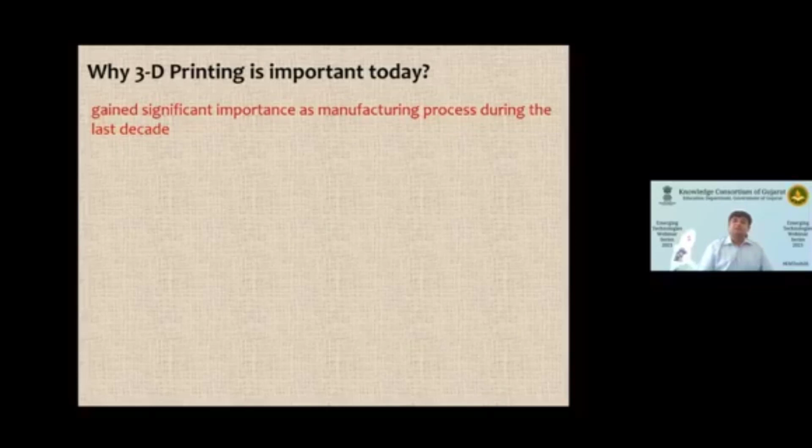For example, if you look at a market survey conducted back in 2017, it says that the market for 3D printing exceeded from 1 billion to 6 billion between 2009 and 2016. That's a 6 times rise, which is not a small number. So if you had 100 rupees in sales, by 2016 it became 600 rupees in sales within just 7 years. It's a huge market which has grown.

In fact, if you look at the Wohlers report, what they forecasted in 2016 is that it's going to grow at an average CAGR, that is compound annual growth rate, of about 31%. If you keep growing at this rate, you become a huge business. And if you look at forecasts made in 2016, valid till 2025, people are saying it's even going to grow at a much faster rate than what Wohlers reported.

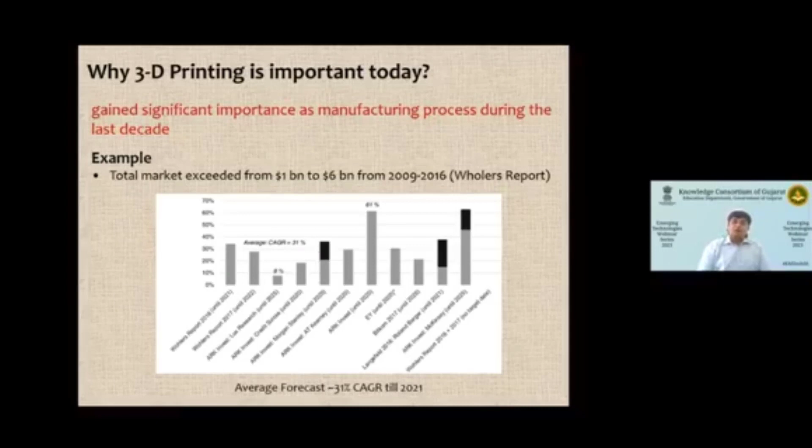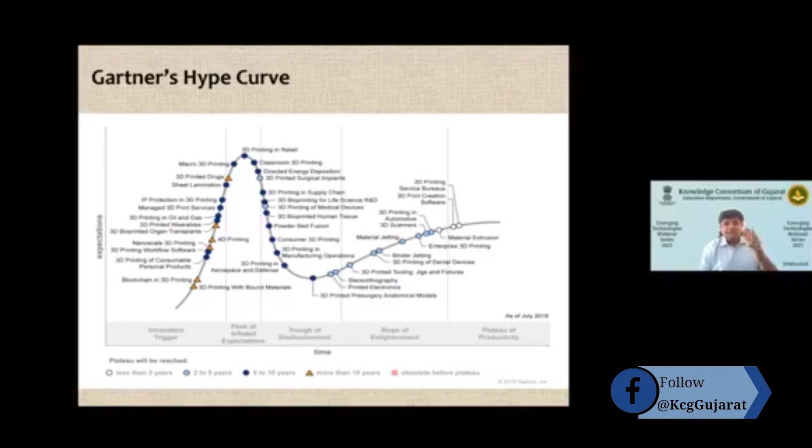For budding engineers who want to know the newer technology trends, I advise them to see a journal or articles published in a document called Gartner. Gartner's hype curve in 2018 presented different 3D printing technologies at different levels of maturity in the life cycle.

If you look at the right hand side of the screen, this has reached a kind of mature level. On the left hand side of the curve, it is something that is actually being conceived in the minds of people. In between these two extremes, the technology grows, eventually expectations fade, and then it becomes mature. For example, the concept of 3D printing today has reached a maturity level, so people understand that this is something they can do via 3D printing, and it is a process with potential.

In fact, one of the commercial processes like material extrusion, which Professor Patel was mentioning in his talk, has also reached a maturity level. When the technology reaches the plateau of productivity, it is understood that the technology has started becoming mature. A definition of maturity is that a common person knows this technology and accepts it as a standard solution.

If you look at the second zone on the right hand side, it is actually talking about the slope of enlightenment. I'll tell you briefly about any new technology. Whenever we talk about new technology, the first thing that happens, seen on the left hand side, is an innovation trigger. So what happens? People will think, can I apply this to a given problem?

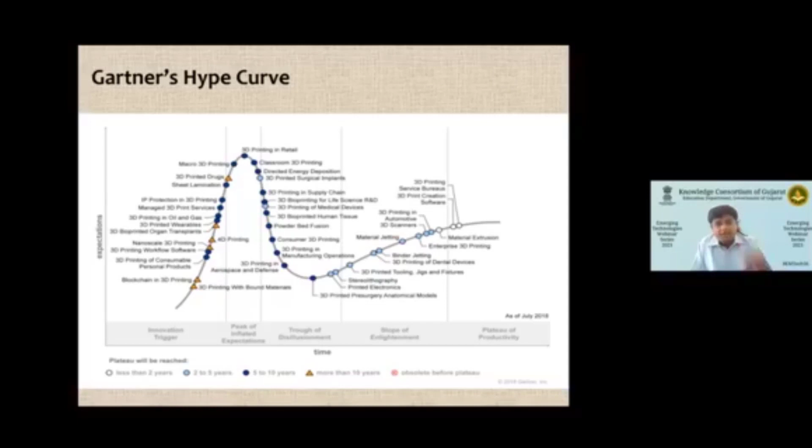So with this background introduction, what I presume for this talk is the audience does not know 3D printing at all. So maybe a few initial minutes I would spend on talking about the basics of 3D printing. And eventually we will go to some of the unusual applications, for the people who actually know 3D printing a bit. Where can they take their technologies forward, and some of the unusual applications. What do I mean by unusual? This is what we shall also talk about subsequently when we actually go into that particular aspect.

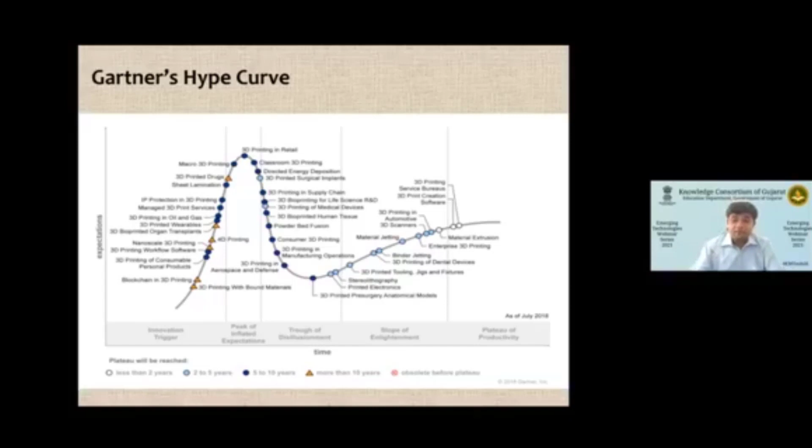Okay. So if you ask a layman or somebody who has a little bit of knowledge of 3D printing this question: what is 3D printing or additive manufacturing? This is a common question that you should have, and somebody who is a completely non-knowledgeable person would say, what bluff is this person making? Let me ask him this question, what is 3D printing or additive manufacturing? So I would say that if you look at history, it originated as a rapid prototyping solution. So another common name which you will find for it in the literature is rapid prototyping.

Now, what do we mean by prototyping? All of us have studied different prototypes, be it an engineer or a non-engineer, at one or the other point of time in our life. We all have studied prototypes. So these prototypes are the replica of the actual component. Say for an example, my son is in second standard, so when he was going to school, he asked me, what is this globe?

So there is a very nice globe which we all see in early schools, which talks about orientation of continents and water bodies. It is not a globe, but it is a prototype or a replica of a globe. It helps me in realizing that the globe on which I am living has a certain shape. This is my neighboring country, without actually going there. Even if you go to higher level schools, people talk about a prototype of a solar system. So we say that this is the sun at the center, and the sun also revolves and rotates about a certain axis. There is an earth which is lying here. So these are all prototypes.

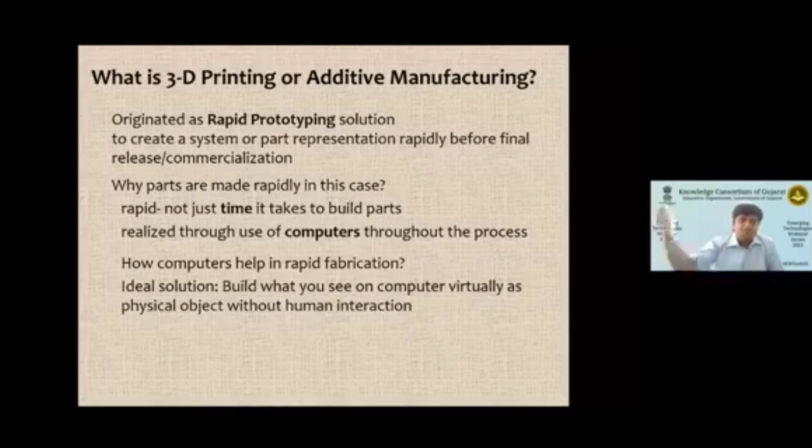Here the thing is, my computer is connected to a machine. I press a button, the things will go to a machine and the machine will start doing things on its own. At the end, when it completes, I get a message on the computer that says, ready for delivery. I go to the machine and I collect it. So this was the philosophy. And this is how people started building 3D printing.

So the overall philosophy was, as Professor Patel also mentioned, that a virtual representation of a physical object on a computer was called a CAD model. And you transform the CAD model directly into a finished product. So what advantage do you expect if it is reality? You will be gung-ho, right?

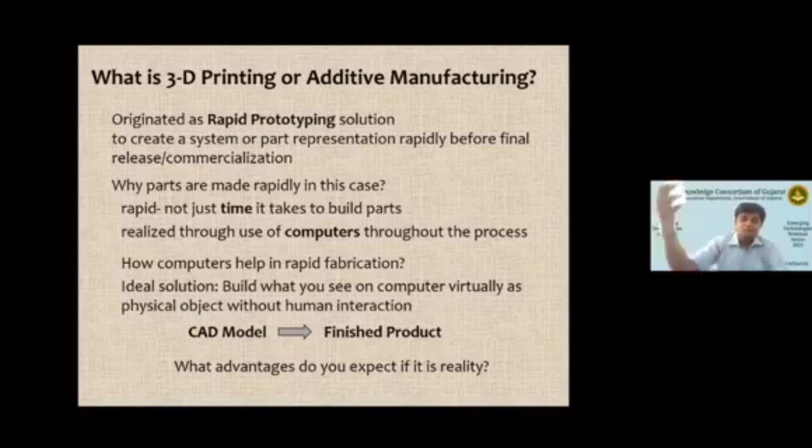You don't need to worry about manpower. Labor was a big problem in COVID times. A lot of manufacturing engineers would tell me, if this can happen, I would jump to buy this machine, right? So there are many advantages. You are not relying on an operator. You are not relying on the skill of a person at all. You are not relying on a lot of other aspects, that this person will give me that, that person will give me this, and if they all come together, I will build this. All these questions would disappear from the mind and you will become fearless in designing. You will become fearless in manufacturing. So there are many advantages.

So before we actually look into 3D printing, let us look at a couple of approaches for how a component is made. Historically, say this is a component that I want to make. This is just a cross section, and it has some depth, some thickness, which is not shown because we are seeing it on a 2D plane. If I want to make this and go to different people, one person would say, I would take a larger piece and cut the shape out of it. This trimming of the unnecessary area from the raw material is referred to as machining.

Another set of people would say, why are you cutting? You are producing waste. Rather than that, break this into two pieces and then stitch them. And there are commercial variants available. A lot of people would say this is welding, joining, brazing, riveting, whatnot. So there are manufacturing processes available to achieve this. So this can be another approach to realize this.

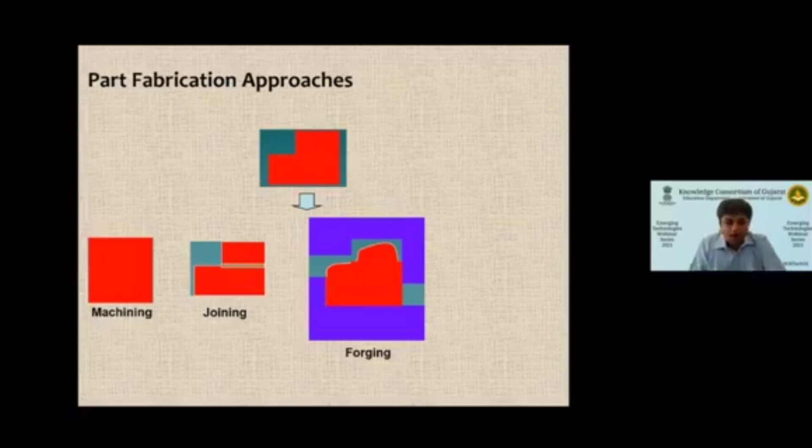A third set of people would say, no, I have a die and a punch, and I would compress the near net shape component between these two in order to get the required shape. Those who are manufacturing or mechanical engineers know this operation; they call it forging. But what do they do in 3D printing?

...is philosophy. And if you look at these three, to reach a final object, all three follow different routes. Say if you talk about machining, you are going to cut. That means you need a mechanism to cut. If you are talking about joining, you are going to need a physical mechanism to create a joint. If you are talking about forging, you need a punch and a die, which is tooling, and then you need a component which has a shape close to what you are seeing.

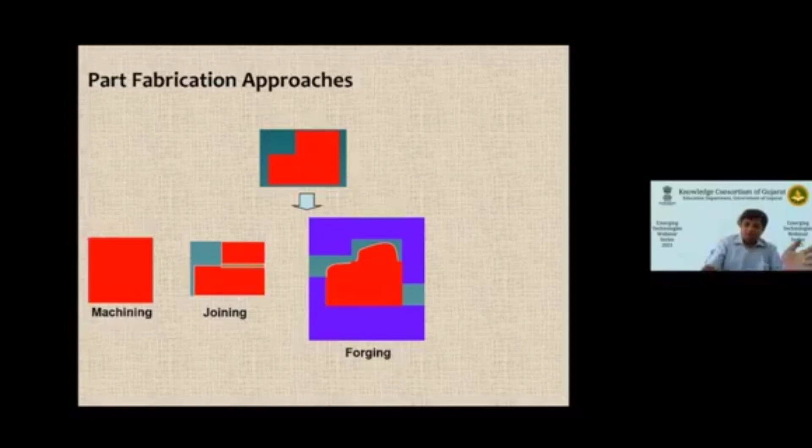Although one more option I have not included here, there are many more options, but these three, if you look at them, have unique approaches. When you talk about rapid prototyping or additive manufacturing, it also has a philosophically different route. What it says is, you basically slice a component.

So rather than having a final idea of a final shape, what you do is you create slices. You know these, and you know the sequence in which these slices are to be joined. And you design a joining mechanism for these slices, and then you build an object. These are all different slices, joined together in order to realize a component. And this is the driving philosophy for building a component using rapid prototyping, 3D printing, or additive manufacturing.

Please understand that. Okay. If you look at the example, say you want to design a very elegant and aesthetically pleasing teacup, because we've been speaking almost 20 or 30 minutes now, so you are tired and you want to have tea. So there is a computer model of a teacup that you created, and you want to achieve a 3D printed cup of that, so you can actually build it. You can see this is a reality today. All these layers are built, deposited together, and a cup is generated.

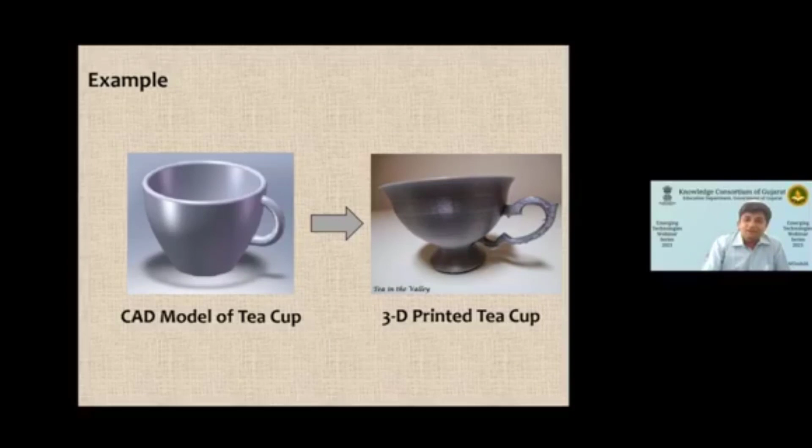So the overall philosophy of the process is what? You build a CAD model as an idea. In your computer, you have a mechanism to slice the object. So you create slices. This second operation also happens on a computer. So the first and second operations are done on a computer, and this computer will send an instruction to the machine to actually generate a physical object. So in the third step, your physical reality happens. Steps 1 and 2 merely happen on a computer.

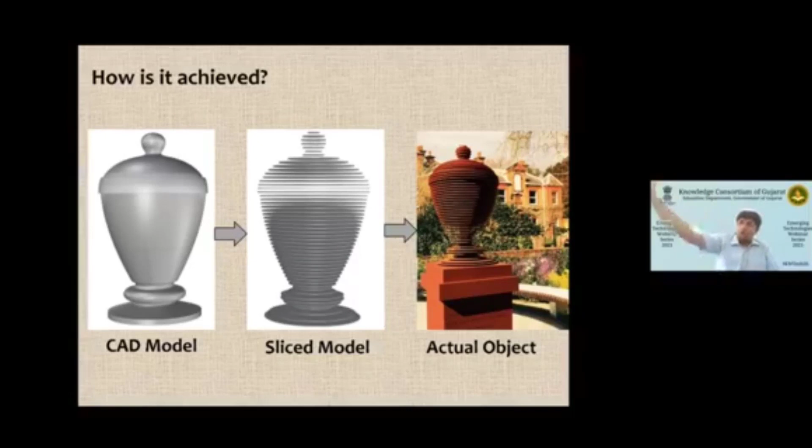It also helps you save time. The reason is, your machine will not be occupied. When you are doing this, it can do some other activity. So there is an inherent advantage of the process, because the machine runs in a completely unattended mode, since the instructions to run the machine come from the computer. You do not need an operator to run the machine, unlike typically a forging machine, or a lathe, or a milling machine, or a drilling machine. The machine will run on its own. You need to generate an instruction on a computer.

So if you look at the 3D printing community, a lot of people work in these two rectangles, and these two rectangles are the software part of 3D printing. Meanwhile, there is a big challenge in terms of joining, because in Gujarati we all know there is a proverb which says Sandha Etla Vandha. And here you are creating infinite joints, and the challenge is how all the layers you created will remain together so that this looks like a cup, and when you hold it in your hand, it does not bend or break because your joining was not proper.

So there are challenges in joining. So there are a set of people who work on what are the challenges. There are challenges in terms of creating this slice. It's not simple. When you give a command to computer, there is something at the back of your computer, some program which you have written which does this slicing, some mathematical equations that you have written in form of a software code which does this. So there is a challenge.

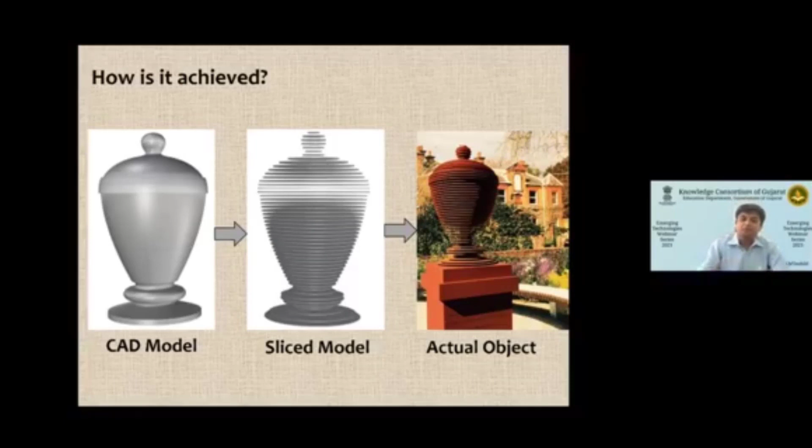Now, those who are working in developing a physical object basically worked on different technologies. So they say that the raw material that I pick up, because to build this physical object, I'm going to need some material. And you know the material will be available in either of the three forms, which could be a solid, or a liquid, or a gas.

So there were people who chose solid as an option and started building this physical object, and they picked up a solid wire. They said that I will melt a solid wire and I will deposit it, and then eventually it will solidify in form of a layer. On top of it, again I will build another layer. This is one of the very common and popular approaches which uses a solid wire. And the process is known as fused deposition modeling.

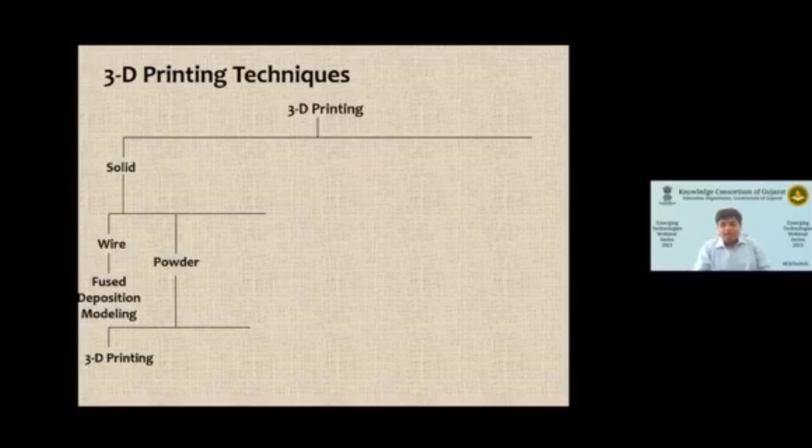A lot of people said, I don't want to pick up wire, I can pick up powder also. So a lot of people actually picked up powder. So it's a solid material converted in form of a powder. And then somehow you deposit a layer of powder, and then you create a thickness layer from that powder, which is a solid entity. So when you do some action, it becomes solid. Eventually, you use that as one layer. On top of that, again, you deposit a powder, you do some action. So both these layers will get joined, and subsequently different processes were developed.

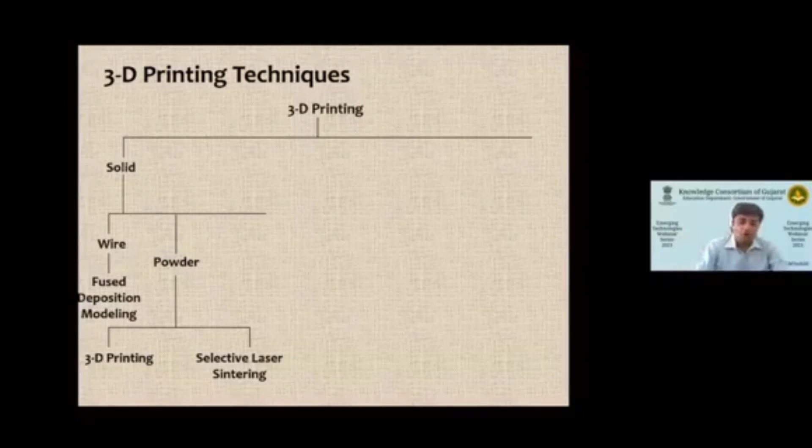There are two very popular commercial processes available in that route. One is known as 3D printing. There are two more variants which we shall talk about subsequently, and another variant is called selective laser sintering.

A lot of people said, I don't want to pick up wire, I don't want to pick up powder. They said, I will pick up a foil. So a lot of you would be carrying food in your tiffin, and to keep it hot, we all use a foil, aluminum foil, right? So in aluminum foil, I wrap the food. The advantage of aluminum foil, or a structure like aluminum foil, is it is already available in a layered form. See, the challenge in wire and powder is I am building what? A layer from something else. But here I have a layer readily available.

So what I do philosophically in a foil is I put two foils together, and then eventually I remove unnecessary areas, because the foil would be available in a standard shape. So I will cut the foil to some shape which is available in that layer, and then I will deposit one layer, one foil over the other foil. And you all know there is a technology available to do that, which is called lamination technology. So you all get your mark sheets and the papers which are to be preserved for a longer period laminated. And that is why the name given to this process is laminated object manufacturing.

There is another route. As I said, you cannot use liquid, but there is an intermediate route wherein you bring a paste. So paste is something which is like a Colgate, a mushy state. So it's a semi-solid state. I can also use a semi-solid state to deposit a layer.

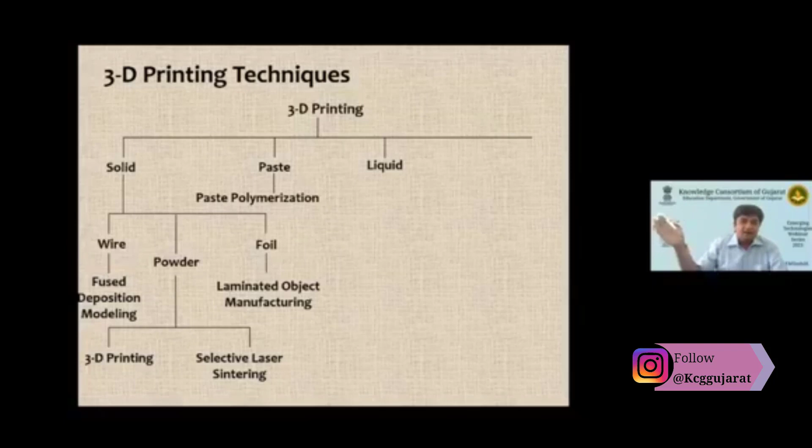Eventually, I have a mechanism to solidify the paste into solid shape in the layer, and then I deposit another paste layer, and over a period of time, I build a component. The other extreme of a paste is a liquid. So I can also use liquid, and there are different routes in the liquid route.

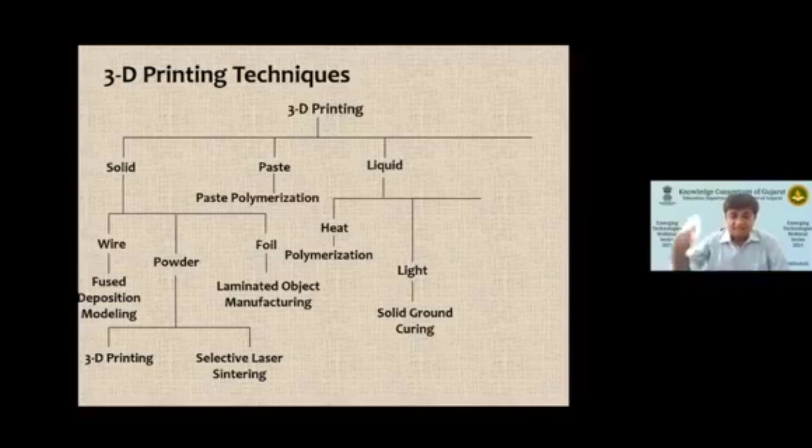So what you do is you increase the temperature of a liquid by heat. The process is called polymerization. I can apply light on a liquid, so it gets cured, it converts itself to solid. Or a third option is I can always incident a light of a certain frequency. So that is called stereolithography.

In fact, a lot of people are exploring, can I convert gas to a solid directly? Those who are researchers in this domain would be knowing a technology called LCVD. So this is where people are trying to build a layer of a solid from the gaseous state itself. So ultimately, this is the state that I pick up from which I build a layer, and then I build subsequent layers, and these subsequent layers together will result in a three-dimensional component.

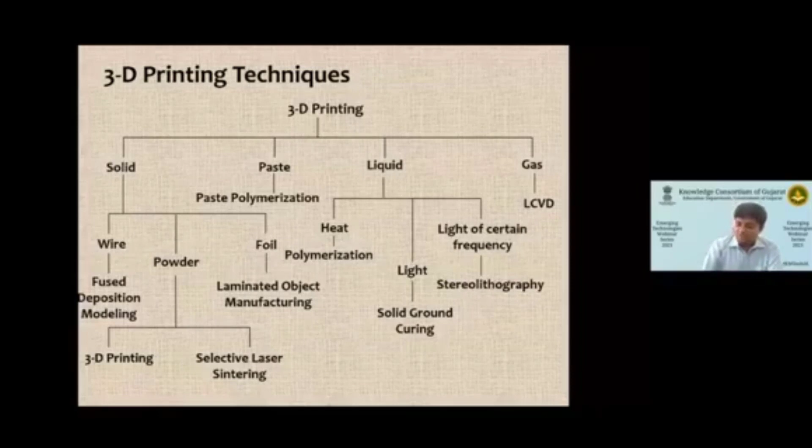So these are different 3D printing technologies that a lot of people build. And when people start building many technologies, some standardization is necessary. So there is a body called ASTM, and this ASTM has given a classification of 3D printing or additive manufacturing into not seven, but actually 8 groups. So they say that one of the governing principles that you use for building a component can be extrusion of a material. If you remember, we talked in a previous slide about a wire.

So what I do is I have a heater. In that heater, the wire goes and the wire melts, and what comes out is a paste-like material, which is an extrusion of the liquid material. The process in that family was known as fused deposition modeling. The technical acronym given to that is FDM. There were powder-based processes, as we discussed. The technical name given to them was powder bed fusion. And another name which was given was selective laser sintering, SLS.

2 more variants were also clubbed together into a family, which are mainly depositing a liquid jet and then letting it solidify. So that was called material jetting. We shall be talking about all this subsequently. Another variant which was developed was binder jetting. Another classification which they gave was sheet lamination or laminated object manufacturing. Converting liquid directly using a light source, those processes they put together into a VAT photopolymerization family.

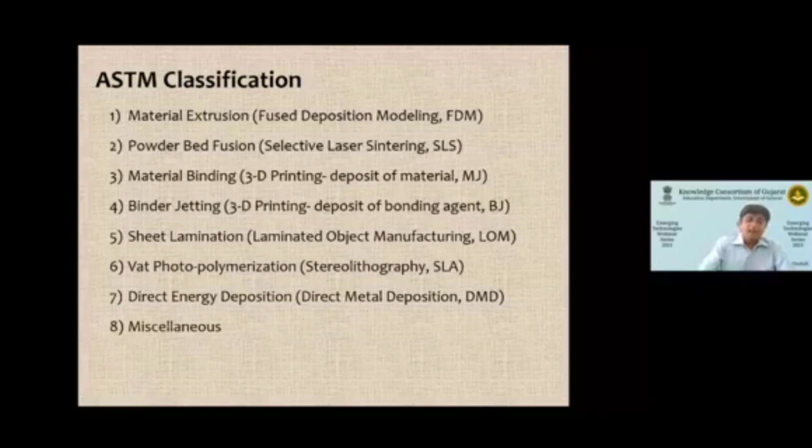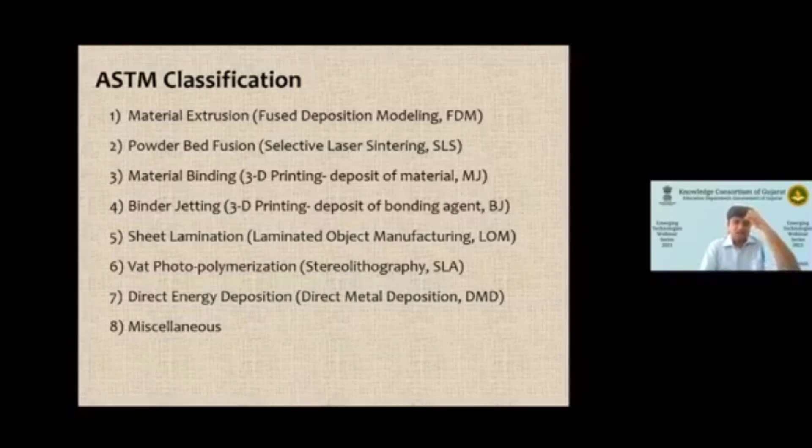In fact, the 7th one was developed very recently, maybe a decade ago. It is called direct energy deposition. It is not developed as a prototyping process. It is developed as a final component manufacturing process. We shall talk about it subsequently. It is a DMD. Anything which does not belong to these 7 cases was put under a miscellaneous category. So this was the classification which I wanted to discuss about additive manufacturing.

So before we move further, I would like to know in case the participants have any questions, please feel free to ask at this point of time. We shall have a pause for a minute, and if you don't have any question, we shall go to the subsequent part of the discussion, which is going to discuss all these processes in 1 slide each, bringing commercial solutions related to that. So if you have any questions, please feel free to ask at this point of time. Okay, so let us start back.

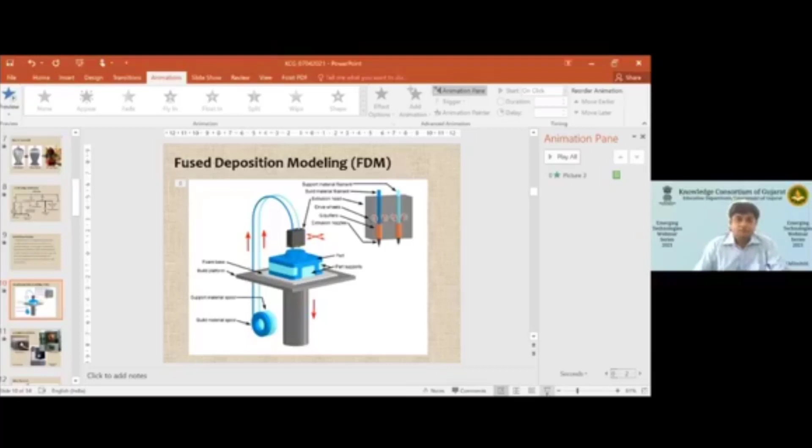So in fact, we talked about 7 variants of the processes. And one of the first and commercially very, very important variants of a 3D printing process is fused deposition modeling. So what you do in fused deposition modeling is you take two wires. These wires are made up of two different materials essentially. These wires would go into a heater chamber. You can see a magnified diagram of a heater chamber on your right hand side. So this heater chamber would heat the wire and it would generate a liquid or pasty material out of it.

What is the role of these two wires? Say for example, I am building a component which is a dark blue color. So when I reach somewhere in the middle, say somewhere like an I section, when you reach somewhere here, what will happen? I will deposit a thin layer.

If I have a structure like this and this blue colored entity is not there, the material would fall down. So what I need to do is create a support so that the material does not fall down. This material is called the support structure material.

If you look at the wires that you use, typically you have two wires. One is a build material wire, which is the material using which you want to build a component. And a support wire is used to create a support structure, which does the task of supporting.

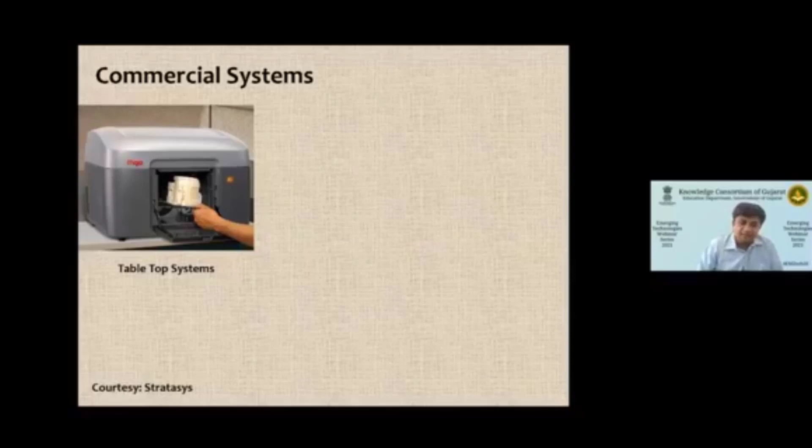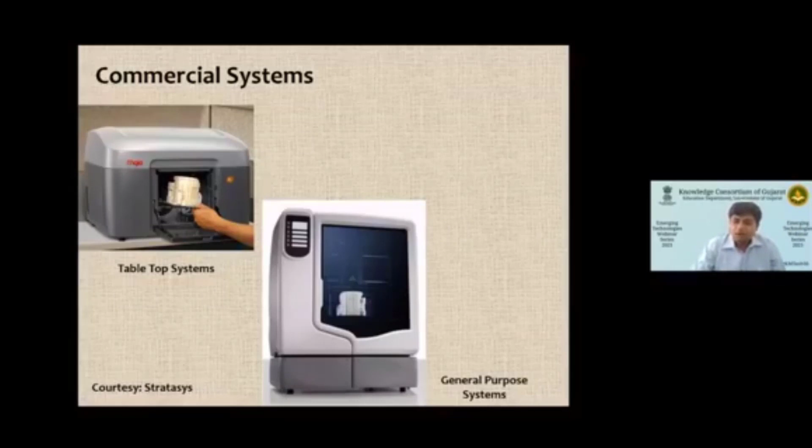A more commercial variant, which you will see in industry, is much more precise, and these are called precision machines. So FDM as a process, if you look today, has become very, very common.

The essential philosophy in FDM is this: you use wire, the wire is melted in a heater, the liquid melt comes out of it, and this melt is deposited in the form of a layer. Then one layer fuses over the other, eventually resulting in a functional component, as aimed by a designer. This machine is connected to a computer.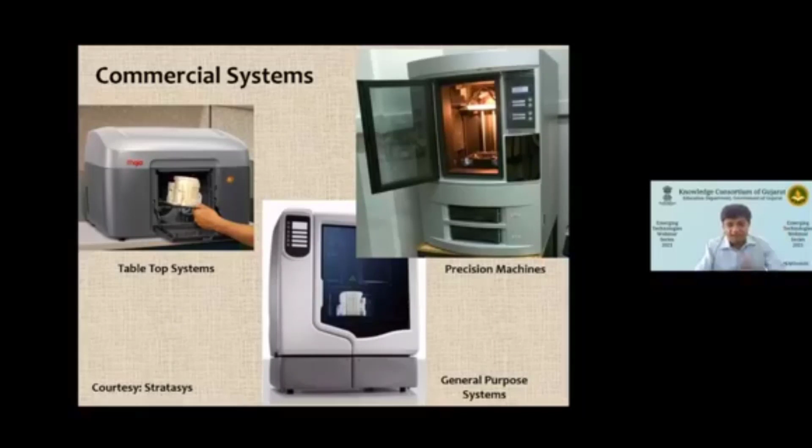The computer generates what geometry it has to deposit in each layer. So the slice information we talked about is communicated from the computer, and the machine converts it into reality. In fact, if you just put this keyword on Amazon, there are 3D printing pens available costing a few thousand rupees.

So this is a 3D printing pen. There is a wire, there is a heater, there is an extruder, and you can build an Eiffel Tower with it. This is now available in schools, and a lot of schools use it to give an idea of how this process works.

In fact, I would say this is available as a toy replacement. I have this at home for my kid, and he knows how to build a component using this. You can build a 3D component, just like a good replacement for building blocks. The only thing is, you have to throw it away. You cannot reuse it and cannot make another component out of it; you have to build another component separately, and the wire is available in the form of a cartridge.

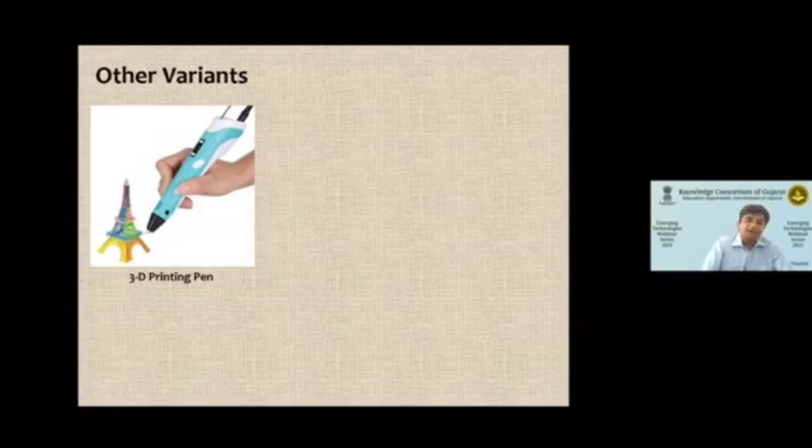In fact, there are multi-axis printers people have also built. They have mounted a torch on a robot, and the robot gives you the freedom of depositing material at any angle, along with many other advantages.

So FDM today is a commercial variant, and lots of industrial companies today use FDM exclusively for different applications.

Another process variant which we talked about is called selective laser sintering, or powder bed fusion. It uses powder as a raw material. If you look at the left hand side and right hand side, there are three chambers. The first chamber on the left contains powder. The one on the right is also containing powder. The central chamber is the build chamber.

So what happens is, two chambers supply the powder, and the central chamber is actually the place where building happens. But since the material is in powder form, you need a heat source. This heat is applied to the powder to melt it, and the powder particles get connected or joined with each other, which is referred to as the sintering mechanism. So you are sintering the powder particles by application of a laser. This is called laser sintering.

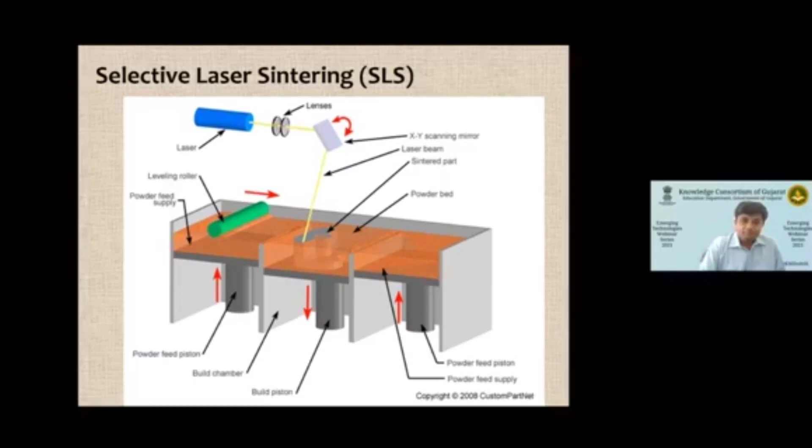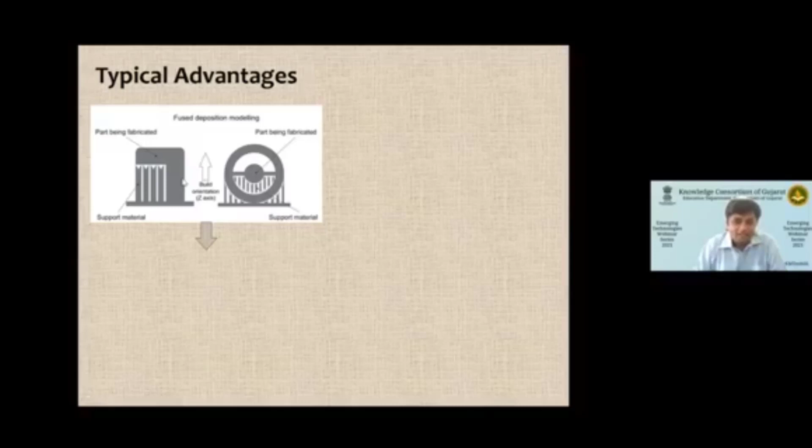The typical advantage of this is that because the powder is available to act as a support material, it is very different compared to FDM, which needs a support material. In SLS, at the bottom you have powder, as you can see here. Even the hollow portions have powder. So you don't need to create a support material to ensure that the semi-solid deposited material does not fall, because the surrounding powder supports it. So this is an advantage.

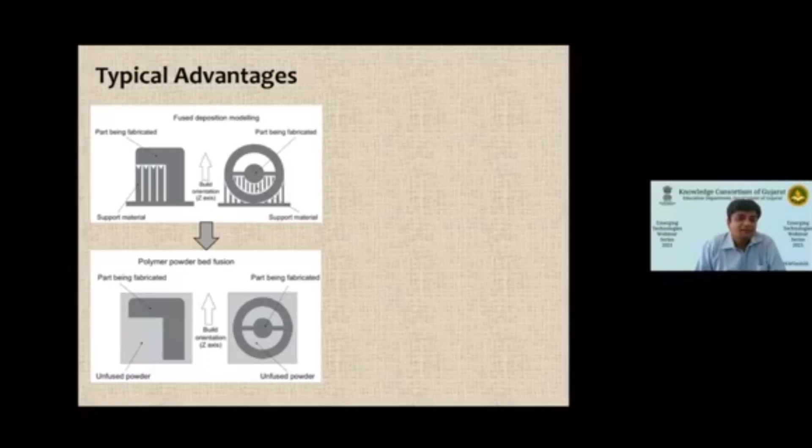In fact, the other primary advantage is I can build a very large number of components. I have a big chamber, and if 10 different components come to me for building, I can put all of them at different locations. All these components, if made of the same material, can be built in the same setting. This is a big advantage of the process. At the end, I take everything out and clean the chamber. It becomes an empty chamber with the table at the top, and the other two powder feeding chambers keep feeding powder.

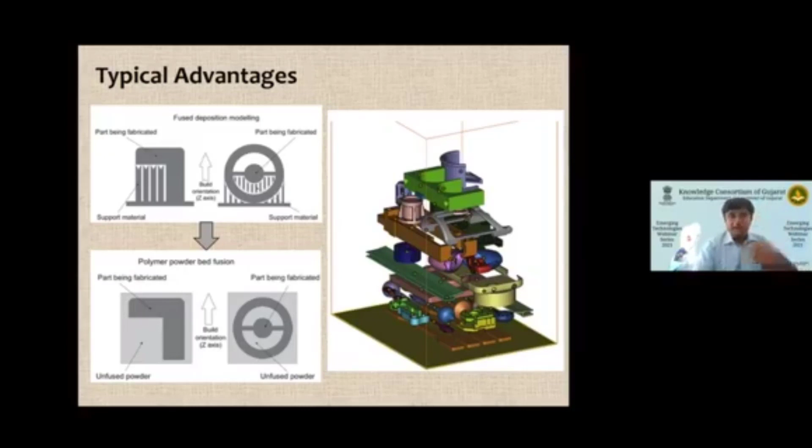A third variant of great interest to industries is material jetting. This works like laser printing or inkjet printing. In inkjet printing, you spread ink at selective locations where you want a letter to be highlighted. There is an inkjet head that sprays the ink to type certain things, and if you look at this inkjet print using a magnifying glass, you will see that there are dots.

So what this process variant does is supply material in liquid form, spreading these liquid particles on a platform selectively, similar to on a piece of paper. The component you want to build is made up of some material, but it also needs support because liquid cannot hang unsupported. So you have to create a support structure, and the nozzle can actually supply multiple liquids.

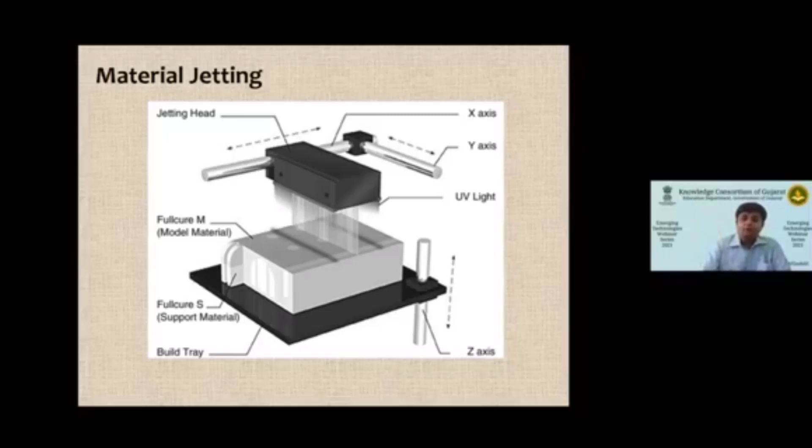You can see there are two materials here. This is a Stratasys diagram - FullCure S and FullCure M are two different materials. One is a support material and one is a model material. All the nozzles you have can supply both, and you can see the white portion was the support material while the black portion was the material of the component you want to build. Eventually the table moves down and you keep printing, building the component over a period of time.

Another variant, made with a proprietary technology of a tech company named ExOne. Here you basically extend the SLS process, which uses powder. You put a layer of powder, but instead of applying a laser to sinter the powder, you use a binding material, something like a glue.

Between two powdered particles, this glue will go and create a bond between them, and eventually you can build a component. This again does not require a support structure like the previous material, because everything is available in powder form. When you open up a component, you can actually get a hollow shape without removing supports, because it's available in powder form and you don't need to remove it.

All of you have seen lamination or sheet lamination processes - I was talking about foil-based manufacturing. In a foil-based manufacturing process, you have a table, you put a first foil, and you cut the portion which is not of interest, leaving only the portion of interest. The table moves down, you bring another layer, carry out lamination, and keep removing and laminating layers in a controlled manner. You generate an object via laminated object manufacturing.

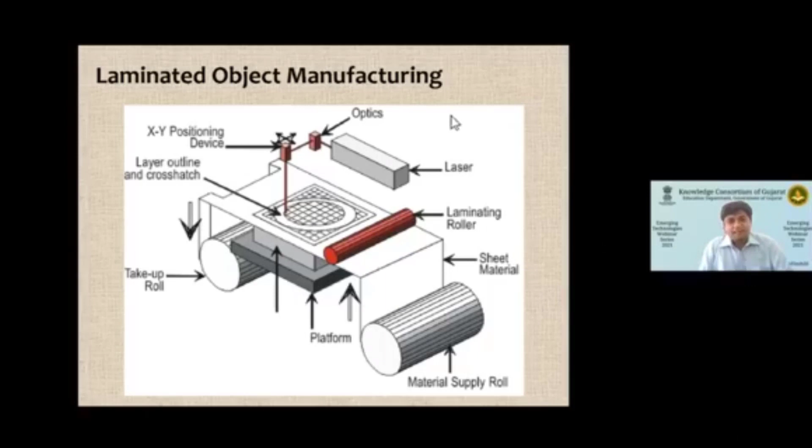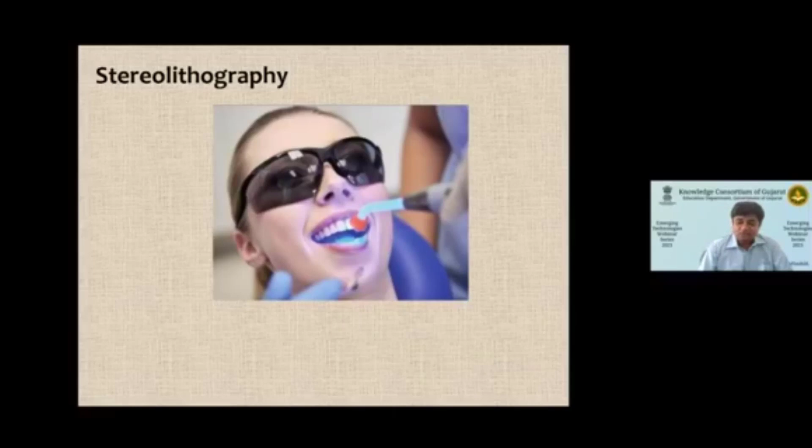This is a very exciting example you might have experienced at a dentist. If you go for a tooth filling, they put a liquid or semi-solid entity into the cavity they created, and then expose a UV light on it. Under the exposure of UV light, that liquid or semi-solid material which has been filled into your cavity becomes solid. This concept was philosophically extended to build a 3D component.

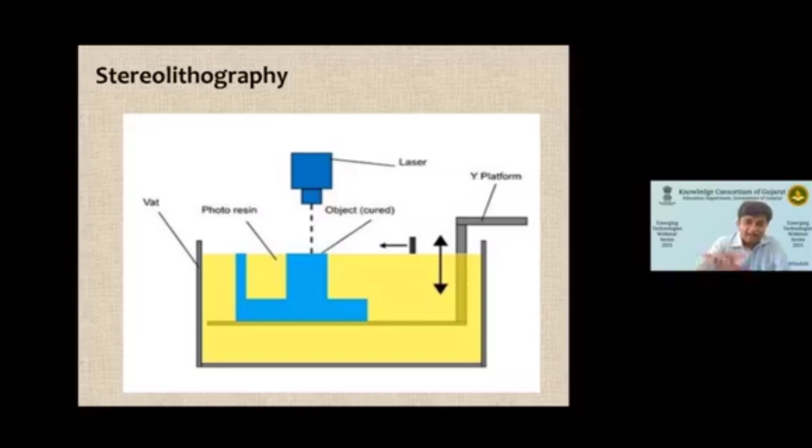The next family of processes is called direct metal deposition. This process is thought of as an additive manufacturing process, not as prototyping. The variants we discussed until now were all thought of as prototyping techniques, but eventually people realized they could build a functional part using this approach. So people said, I want to deposit metal now. But the problems and challenges with metal are very different compared to plastic and powder.

So they eventually developed variants, and now many variants are coming. In the last 10 years, a large number of variants in this family have been developed, two of them very popular. In one, you have a metal wire and an electron beam - they interact, converting it into a particle, which is then deposited in a controlled way to generate a layer. Eventually the build platform moves down, you deposit another layer, and this process is called direct metal deposition. Another variant doesn't use a wire but uses a powder instead.

So what you have is instead of wire, you have a powder coming. It is something similar to a coating wherein you coat a layer, eventually you coat another layer. A series of layers together would help you in building a metallic component.

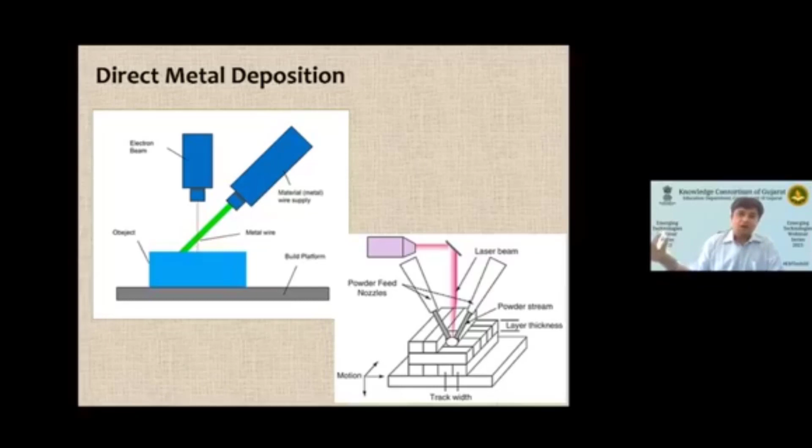Or if you talk about fused deposition modeling, the requirement is very different. And that is what you have to appreciate, that every technology has their own advantages, limitations, and that needs to be supported through a software. So there is no universal software which will say, okay, I can supply the instruction to all the 8 variants. Maybe in years to come that might become a reality, but that does not exist commercially today, or it is not very popular commercially today.

Now, once you are familiar with these processes, you know that there are some typical applications, because the process was thought as a prototyping technique. And then it was extended to some of the applications. People said, if I can build a prototype, why can I not build a part directly? What is wrong if I want to build a part directly? So people have already extended 3D printing to additive manufacturing.

So additive manufacturing is a direct digital fabrication. What people imply, 3D printing or rapid prototyping solutions are only aiming at developing prototypes, while an additive manufacturing process aims at developing a part directly out of a machine. A part means it can be readily used. So you are not limiting yourself to a prototype, you are not restricting yourself to say it's just a demo. It's an actual component. So there is a difference between a demo piece and an actual component.

So people have already extended this technology for direct digital fabrication of production parts. Your production part may be made up of plastic, metal, composites, or ceramics. So today there are commercial variants that can make plastic components, metal components, composites, and ceramic components directly using this route. There are commercial solutions available in a market. You can buy, you can install, you can start a business.

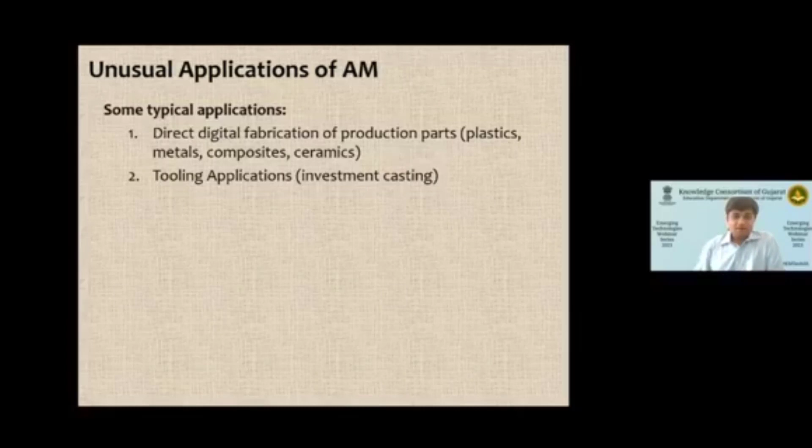What was a bottleneck for them in the old days? They had to develop tooling for their process. Tooling does not produce a component directly, but it is something extra that you have to make so that your component can be made fast. So a lot of people tried to make that tooling for a process like investment casting using the 3D printing route, and today commercial solutions are available.

If you talk about wax patterns that are used in the investment casting operation, all these wax patterns are made today using 3D printing. The majority of industries use that, and they have replaced the conventional way of making those wax patterns, which was injection molding. People don't use the injection molding route anymore. They use the 3D printing route, but injection molding was making a tool, which is a pattern for investment casting.

A pattern is a tooling. You need to have a pattern to make a component. That is what tooling is. So this tooling can be made with the 3D printing route. In fact, people have developed fixtures for machining. People have come up with many other things where it can be done. In fact, the jewelry industry and some sculpting people have also adopted 3D printing as a standard process today.

So these 3 applications, if you look at them, look like obvious extensions. If I can make a prototype successfully, why can I not make a functional part? I can always make a functional part successfully. I can also make tooling. These were obvious applications. What we are going to touch upon in the next 30 minutes is unusual applications. Unusual applications are not accidental or obvious. These are some of the applications where people are looking at 3D printing as a game changer.

Okay. So let's look at some of them in a list here, and then we shall discuss each one of them one by one. When people innovated 3D printing, nobody thought of it as a process which could be extended to biological applications. What do I mean by biological applications? Can I build prosthesis, or organs which go into the body as replacements, or can I build drugs using this route? Nobody would have dreamed about it. And that is why it is called an unusual application.

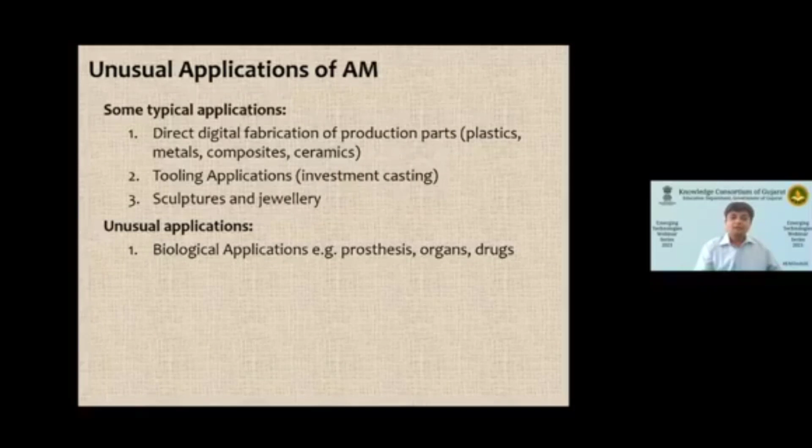Another sector is civil engineering, and today people are talking about buildings via 3D printing. Can I create an entire 3D printed building? Because if I can create that, a lot of things become very easy for me. So if you talk about civil engineering applications today, a lot of people are talking about developing buildings via 3D printing. Building does not necessarily mean houses. It includes houses, but it includes sculptures. It includes monuments. It includes many other applications within that building category.

In fact, Jodhpur is one of the cities which has a good gift of government. We are an IIT here, which is a technology institute. We also have AIIMS in the city, the All India Institute of Medical Sciences, so we collaborate with them on biological applications. Not only that, Jodhpur also has a central government institute on footwear technology, called the Central Footwear Technology Institute. So a lot of people in footwear technology and the footwear industry are today asking, can I use 3D printing to build footwear? Okay.

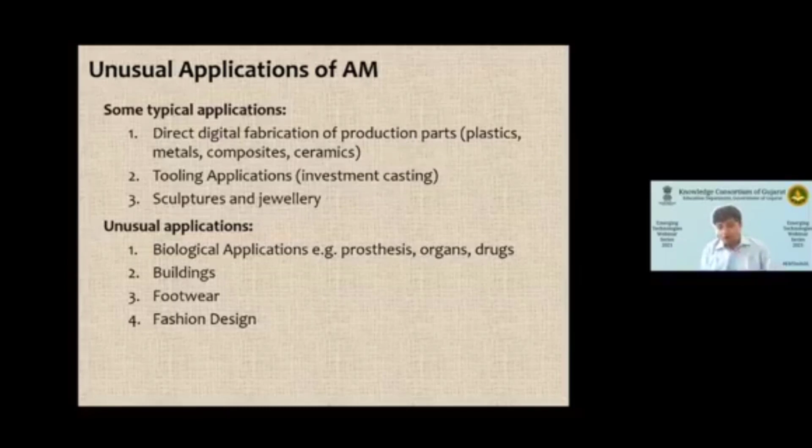And this NID, if you go, NID talks about using 3D printing in fashion designing in a big way. Why I am calling these unusual applications, you will appreciate the fact that these are not obvious extensions. If you look at the top 3, they are obvious extensions, but these are not obvious extensions. But I would say that this is where there is a big application, and this is what is going to be the future.

In fact, we all use wonderful furniture in our house for decoration of homes. Can I use 3D printing in home decoration and furnishing? Can I use 3D printing for building this? If you look at biological application, let's talk about that aspect a little later. In fact, Professor Patel also mentioned NASA exploring making of food via 3D printers. So people are exploring 3D printing of food in a big way. It's going to be a big business now.

And for a country like India, which is an agri-driven economy, if at a farm level a farmer can print food just by installing a machine, it would be a big breakthrough. In fact, developed countries have tire industries which do a lot of innovation in tire design and tire manufacturing. We went from a tube tire to a tubeless tire. If you talk to people in Michelin or Bridgestone, they say the future tires are 3D printed tires. So we shall be talking about all these applications for the next 20 minutes, which shall allow us to cover the entire package in a 2-hour window.

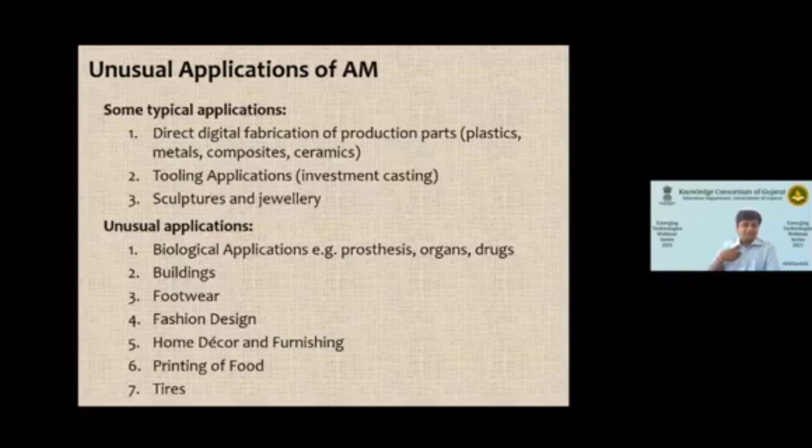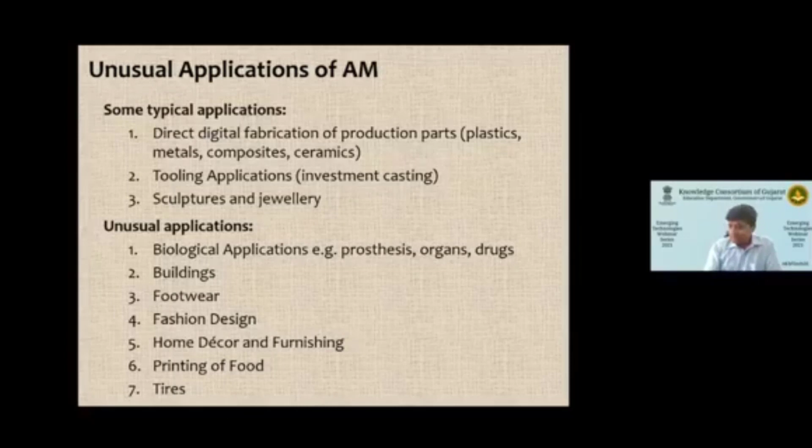The food that you like, I may not like. You may feel it spicy, I might feel it okay. The way your car tire wears out, my car tire will not wear out the same way. In fashion design, home decor or furnishing, the furniture that you like, I might not like. Please understand. So I cannot supply a standard thing anymore, because people are asking for changes and are ready to pay for that today, because people's purchasing power has also grown. So these unusual applications are actually the future of 3D printing.

If you talk about the human body, 3D printing of implants, artificial parts that go into the human body and serve a purpose, is a big business today. You can build cranial prosthesis, surgical guides, scapula prosthesis, knee prosthesis, dental implants, interbody fusion cages, acetabular cups, and hip prosthesis. Please understand, I cannot build this in mass. Every human will have a different hip size.

Therefore, the hip prosthesis that I build would be different. So what I can do is have a solution which can build a custom hip for the requirement of humans. And this is what the additive manufacturing or 3D printing route will offer in implants, because implants are to be customized as per patient needs. So 3D printing of implants in years to come would be reality.

You will have no problem in terms of fitting these implants into a body, because this is all tested from your human body. So you take an entire CT scan or X-ray, you look at a defect, you design by sitting on a computer, you reach a product on a computer, then you tell your machine to build it. So it is designed for you. It is not designed for someone else. Please understand.

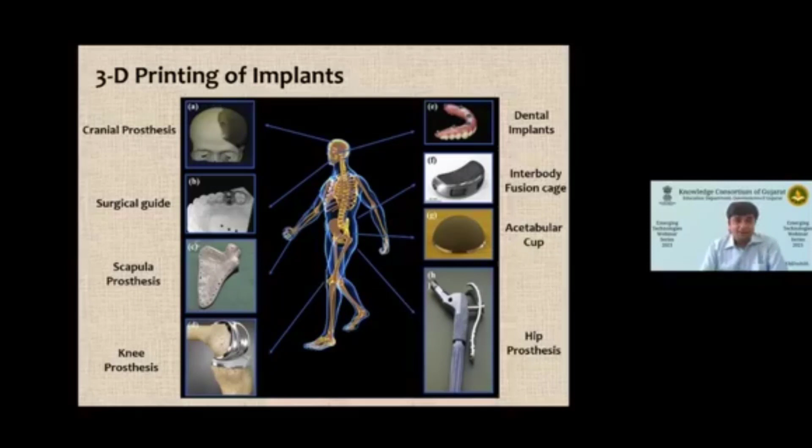The other medical application: in a lot of medical applications, people build silicone, and these silicone structures are usually soft. So the prostheses we talked about sometimes are to be built using a softer structure. In fact, I was talking to one of the doctors in AIIMS some time ago, and he said that I have a very different requirement of building an ear. Because of some reason this person has lost an ear, the current way in which I can build a prosthesis for him looks like this.

It's like your human teeth prosthesis. You remove all your teeth when you get old, and then you put in a teeth prosthesis. Similarly, this ear has worn out. Now this is flexible, this is not rigid. So this is built via silicone. And the conventional way of building it currently, you can see, it looks like a separate part. And as a human, I don't like having such a thing. Although I will be fine with that, I am just using it for the purpose of looking like a complete human, but still I don't like it because it's not looking good.

But in fact, there is a 3D printing route available in developed countries now. It is at a lab stage wherein I can build a wonderful silicone structure via the 3D printing route, and it will fit exactly on me because I have done reverse engineering. I have designed an ear because I have one ear intact. I took a mirror image and then we built it. It's looking exactly like that, and I fit it. It doesn't look like a separate ear.

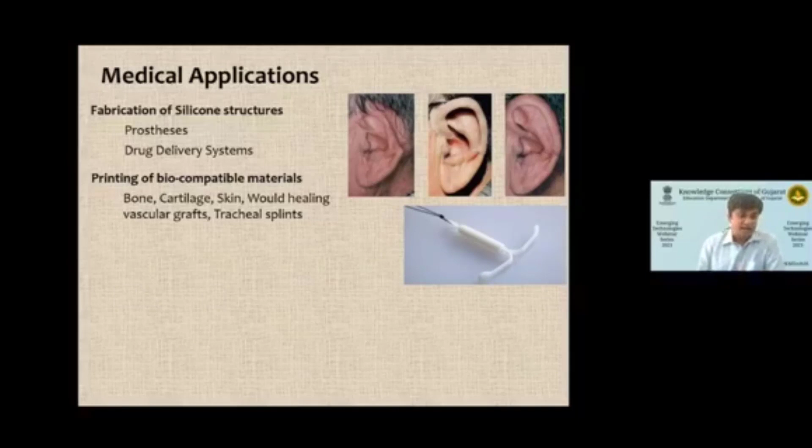In fact, a lot of material that goes into our body should be biocompatible. Say something like a bone that I put in. I don't have a bone, and that bone we have to replace with a new bone. So this bone or the cartilage or skin or wound healing vascular grafts or tracheal splints that I generate, all need to be made with a biocompatible material. So this is a big business area today. A lot of people are coming up with biocompatible materials.

In fact, if you look at this printer, there is a company by the name Osteopore, and Osteopore can build a material exactly similar to your bone, and it is biocompatible. So the structure that it is creating is a bony structure, and this bony structure will go into your body, and eventually it will get accustomed to your body because the material that you have used is a biocompatible material.

In fact, somebody who has worn out this articular cartilage, this cartilage needs to be built. You can see that some ligaments have broken and now you want to replace them. So people are building this ligament which got torn, they build it and then replace it via 3D printing. And this cannot be made generically and just put inside. You just cannot put it. You have to build it for that particular patient.

In fact, for somebody who has suffered burns, you can actually create a wound healing vascular graft. You give him this graft, it has a wound healing medicine which is fitted. Eventually, it will dissolve and it will become a part of your body, and this is becoming very, very common today.

So the medical domain is one of the very important areas today where 3D printing is finding unusual applications. A large number of medical professionals are exploring applications of 3D printing in their domains. Let's look at buildings. One of these ideas came from USC, and the technology was given the name contour crafting.

Those who are interested to see a video, there is a commercial printer which has been made. You can click on this link and you will be able to see the video of how the printer is built. You can see there is a very interesting sculpture that is to be built. You can design this sculpture entirely using software, and people have actually built this entire structure using a 3D printing route, putting one layer over the other, and this is available as a fully functional thing.

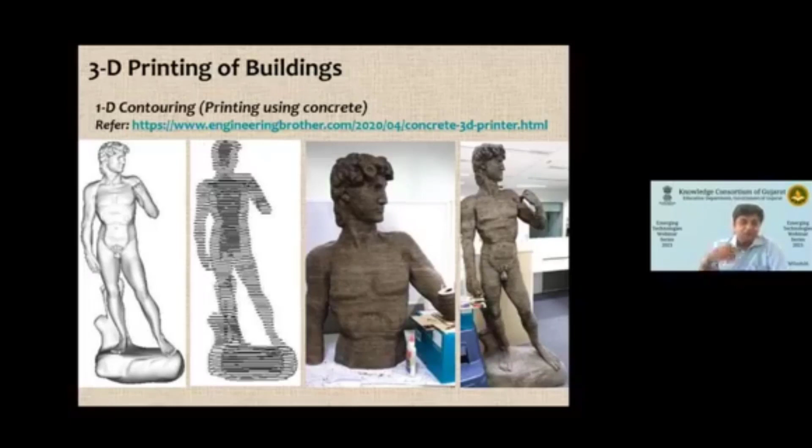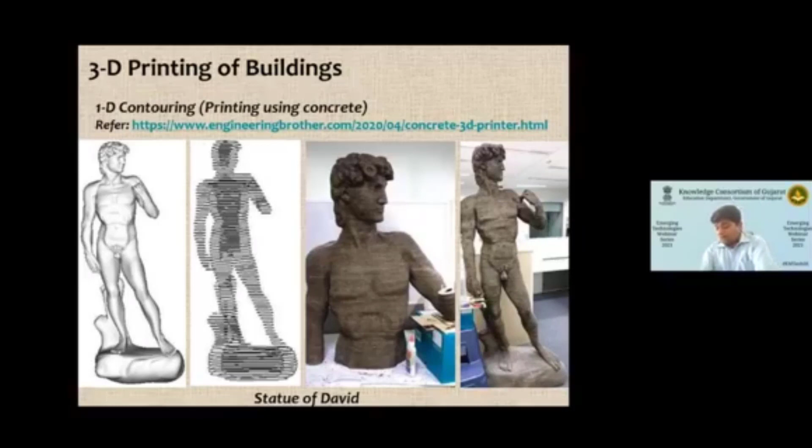So you don't actually need to do sculpting. You deal with natural materials, and natural materials have a good tendency to sinter and fuse with each other. So you can 3D print via this route. This is called the statue of David. You can Google and find out more about it. In fact, there is another variant. For a lot of wooden structures in buildings, a technique has evolved which is called platforming.

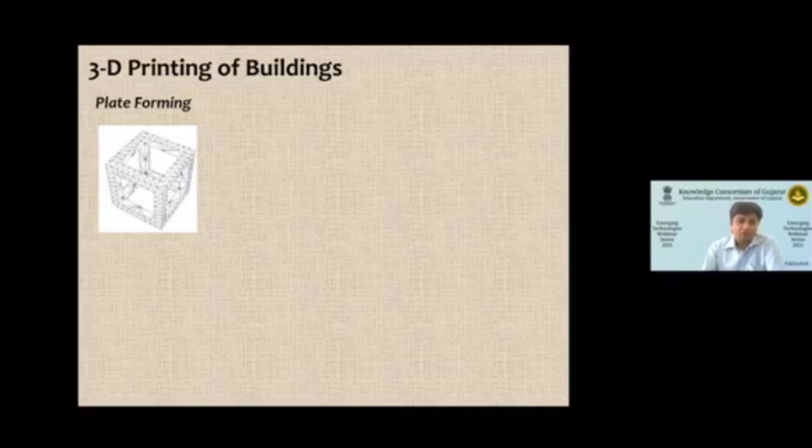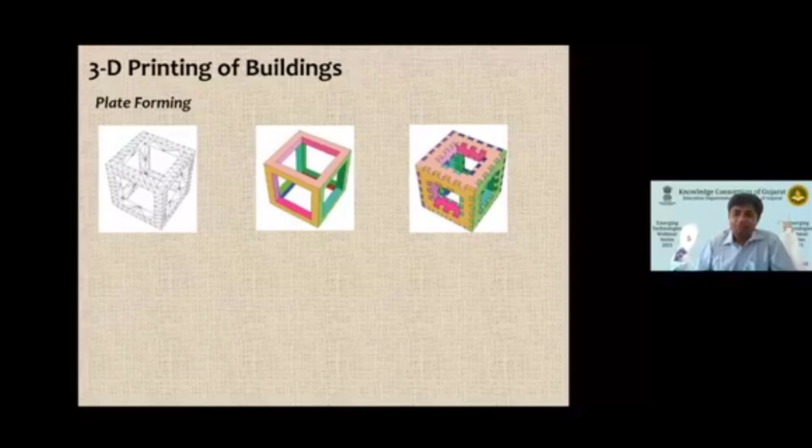Say, for example, I want to build a structure like this. What I do is, at a software level, I make a CAD model. Eventually, I cut it into blocks. These are wooden blocks that I'm going to make, and they would be manufactured using a computer-controlled wood cutting machine. Then these would all be numbered and supplied to a 3D printing machine, and your 3D printing would eventually join them.

So please understand, the technology is not layering, but breaking a component into certain blocks of standard dimensions. In fact, this particular route is becoming very popular in 3D printing of furniture today. All these blocks are cut via this kind of route, but the governing philosophy is still 3D printing, wherein you discretize a component not in the form of layers, but in the form of small blocks. And this is a small kid's game that we all might have played at one point or another, either ourselves or with our kids or grandkids.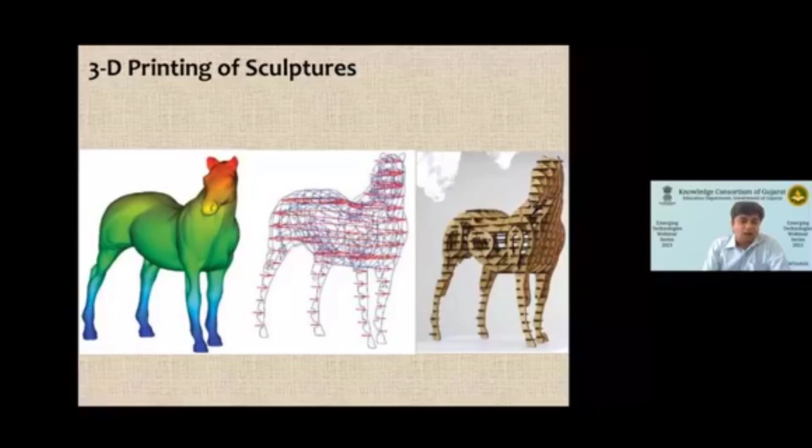So you can also build a sculpture like this. You can see this is a wood horse sculpture. You convert it into small pieces, and then all these small pieces are joined together to build the structure of a horse. This is used in a lot of movies today to create artificial structures, very elegant and handsome looking structures. In fact, if you talk about a full building, this was big news.

You can see there is a big gantry that has an extruder trying to deposit the material, and these are the commercial photos. This is a news item published about 2 to 3 years ago, where people are talking about affordable 3D printed homes for just $10,000, completed in a few days or a few hours. So 3D printing of buildings is going to be a reality. In fact, the Government of India has also funded some projects at IITs, NITs and different places to make this part of the Smart India and Smart City initiatives in years to come.

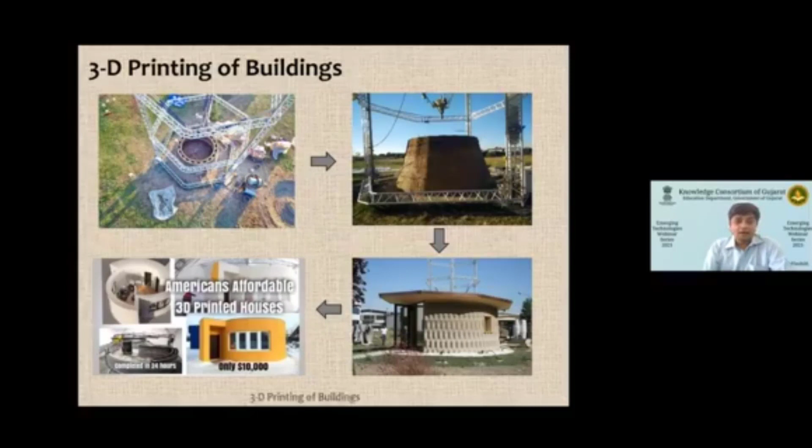Another important aspect is footwear design. In fact, if you look at the big three today, Adidas, Nike and Reebok, they have 3D printed shoes available. It is a very limited edition version available only for sportsmen. But if you look at Futurecraft 4D made by Adidas, these are actually 3D printed shoes, not made via conventional woven technology. Or if you look at the Flyprint series of Nike, these are 3D printed shoes.

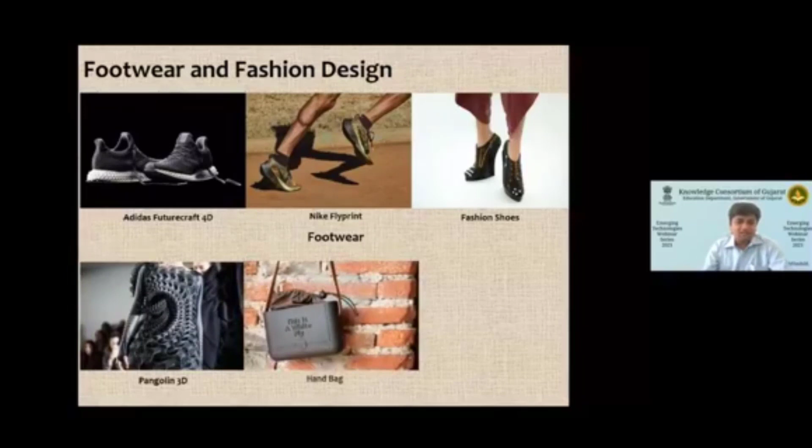And in fact, for women, a lot of people have started thinking about fashion shoes. Can they be built via a 3D printing route or not? Clothes. These are some of the keywords you can try: pangolin 3D or wardrobe of the future.

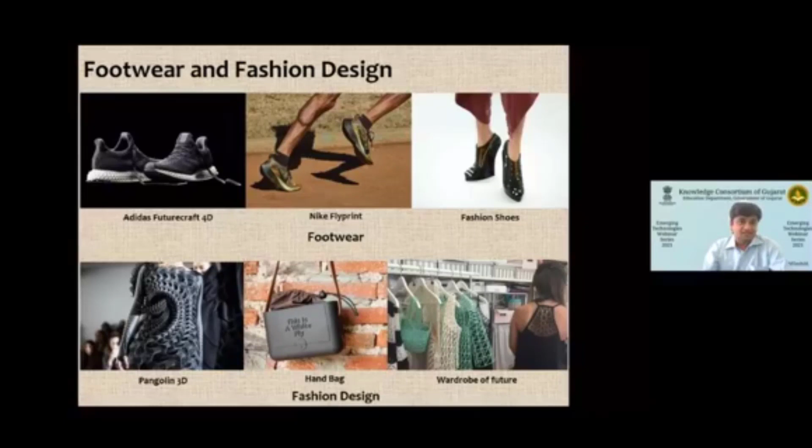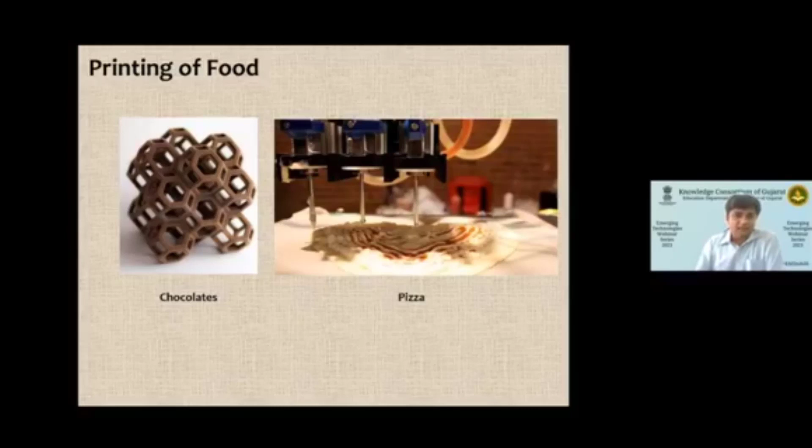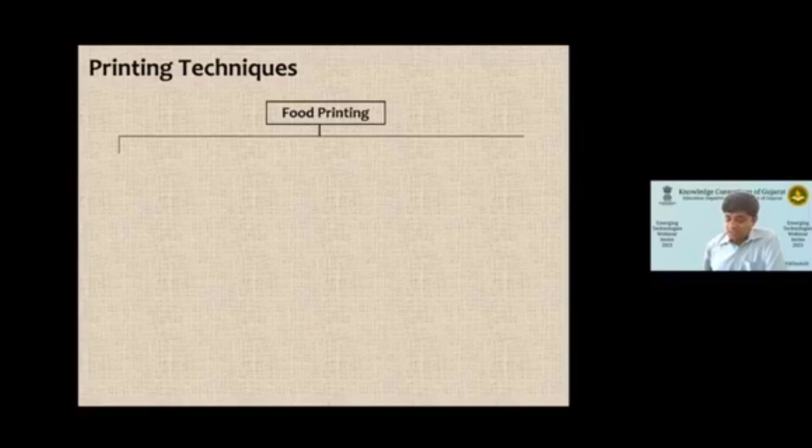I will cover food printing in a little detail, because this is mentioned as one of the important items by the Government of India as a future trend, and many engineering institutes and science colleges are looking at food technology as a branch of engineering or science. For them it is very important.

When people try to print food, there are three different ways people have explored: you can create it via an inkjet process, which we have talked about earlier, via an extrusion process, or via a heating mode.

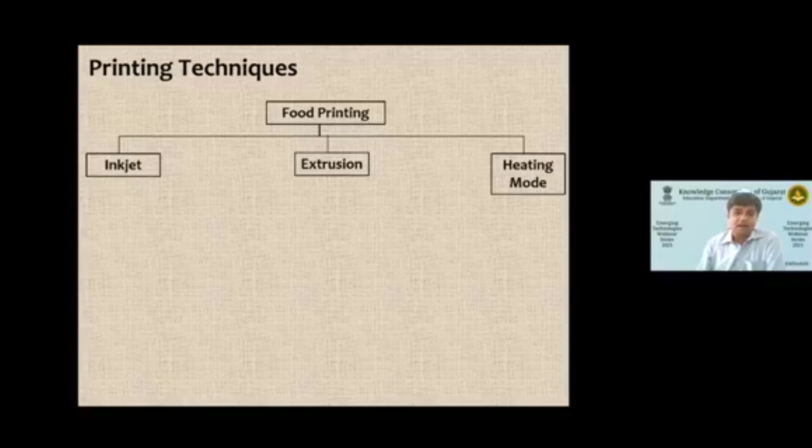Different processes have been developed. Inkjet can be continuous or drop on demand. Some machines supply a continuous liquid which eventually solidifies into food, or you put a drop based on demand. There's also drop on drop technology and drop on powder technology, which is a hybrid, using some powder and some drops only.

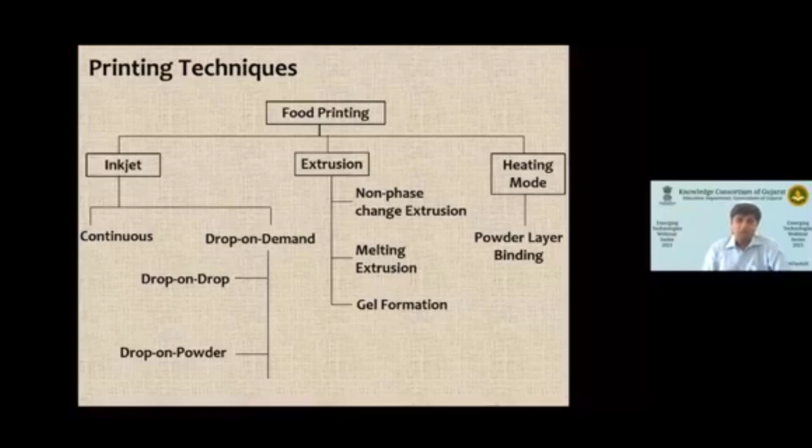In extrusion, people have talked about phase change extrusion and non-phase change extrusion via gel, using melting extrusion or powder layer binding, where powder is put down and bound together, similar to powder candies that all of us must have eaten at one point or another. These powder candies can be made via this heating mode route.

If you want to look at inkjet technologies, there is a company in the US called Foodjet. The YouTube video link is given to you, where you can watch videos of their large variety of machines.

Their machine uses four elements: a platform which is a depositor, a depositor head from which the food particles come out, a supplier system which is a storage including a pump and the food ingredients, and a computer controller with software called the Foodjet Designer Studio. You can see this in a video to appreciate that commercial food printers are a reality today.

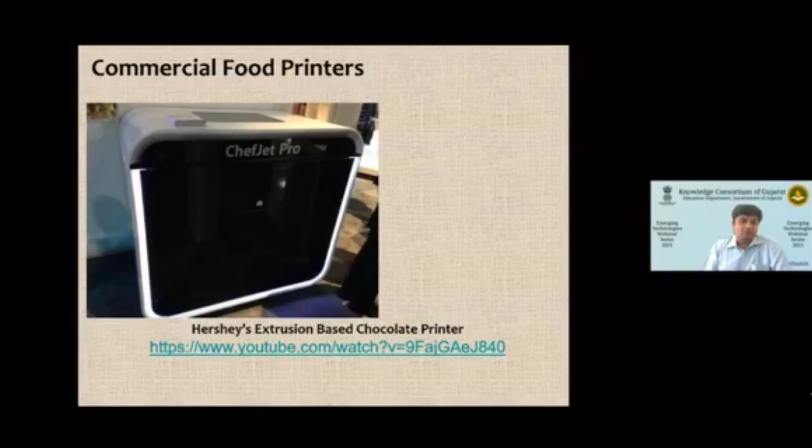This is a photograph of a Hershey's extrusion based chocolate printer, kept in the museum of Hershey. When you go to a Hershey plant you will see this as an item, and they also sell 3D printed chocolates today to visitors coming to see the plant.

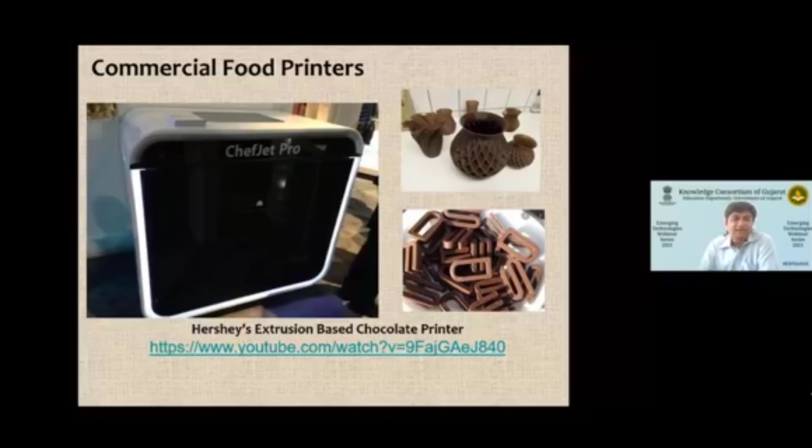You can see typical chocolate shapes fabricated via the 3D printing route, very different and unique compared to other chocolates you get in the market. You can even get a chocolate gifted with someone's own name on a birthday, which is becoming very common today. There is another company in the USA which uses heating based technology to make candies.

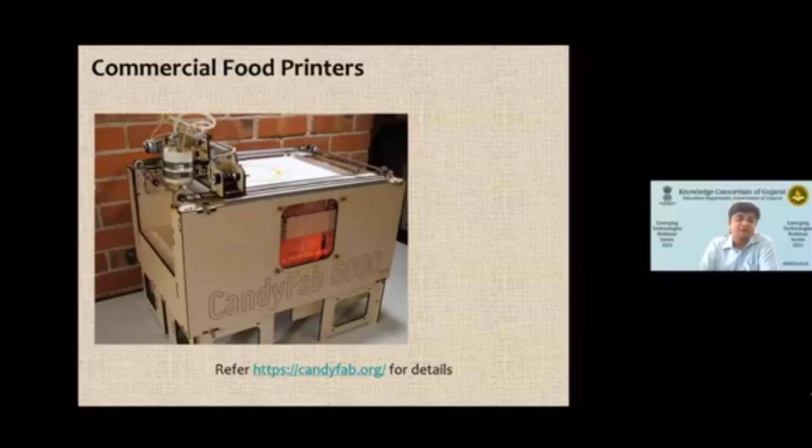Okay, so these are some of the unusual applications where you can think about yourself. With this, I would like to conclude my talk here.